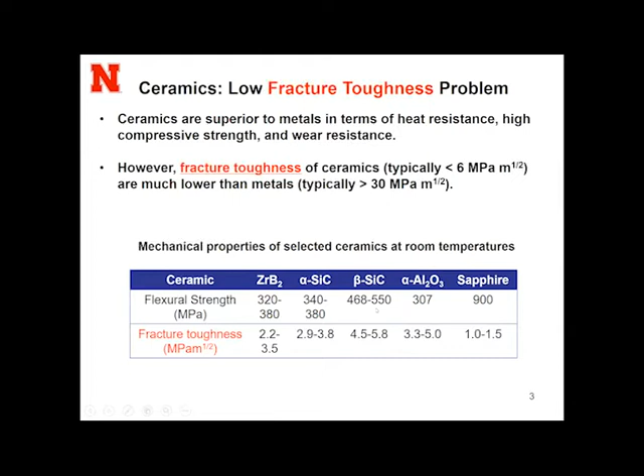The motivation for this work is that all ceramics have low fracture toughness. Also, ceramics have much higher strength and corrosion resistance than metals in extreme environments such as high temperature. Their low toughness is a big limitation for ceramics in industry applications.

To address this issue - ceramics have low toughness because they have low plasticity at room temperature. This results in crack sensitivity, which makes ceramics very brittle and easy to break. So our concept is to use laser shock peening to induce localized plasticity into the ceramic materials to improve their mechanical properties, which I will explain more about.

Our research goal is to understand the fundamental mechanism during laser shock peening of ceramic materials. I would like to say that, compared to metals, laser shock peening is not widely applied to ceramics. So we are doing some pioneering work in this area and trying to understand the scientific mechanism.

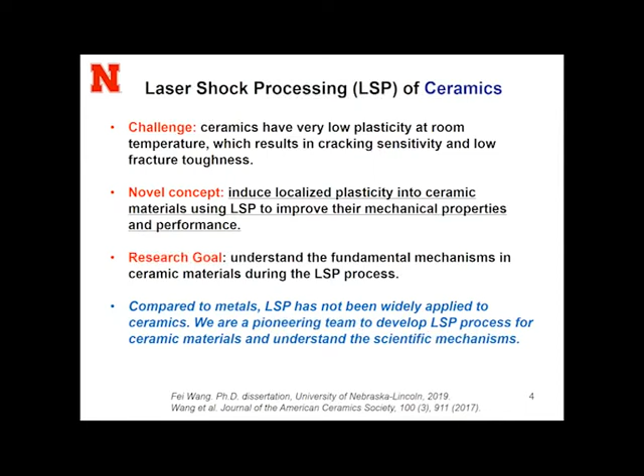I will skip these slides because many speakers have already talked about laser shock peening, but I would like to highlight something here: the shockwave has very high pressure, several gigapascals, and the plastic deformation occurs at a very high strain rate. This will be important for understanding the mechanism.

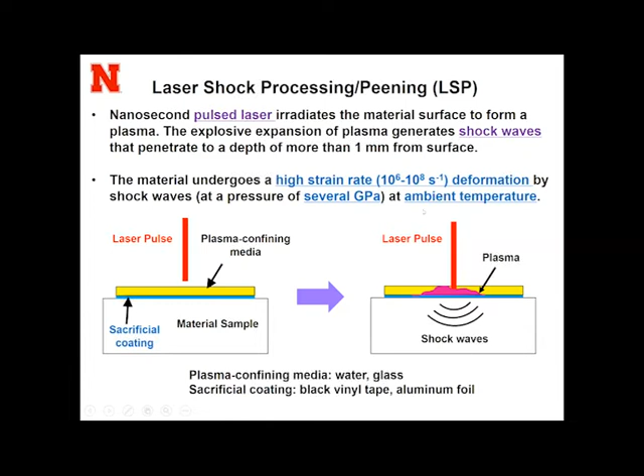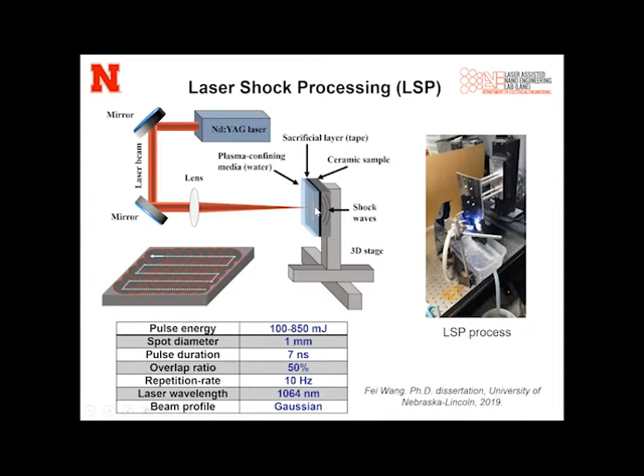At Nebraska, our lab developed our own laser shock peening system. This is a lab-sized experimental system. We use an Nd:YAG laser with nanosecond pulse duration, and we have our setup for peening the sample on a three-dimensional stage. We control the scanning of the laser beam for laser shock peening of large areas, or even curved surfaces. The hypothesis here is that the compressive residual stress generated by laser shock peening can improve the cracking resistance of ceramics.

This compressive stress can inhibit crack propagation on the surface. This is actually motivated by previous work in ceramics that generated surface compression using shot peening, thermal quenching, or similar processes. A lot of research has reported that putting this surface compression in place can improve fracture resistance, wear resistance, and provide many other benefits for ceramics.

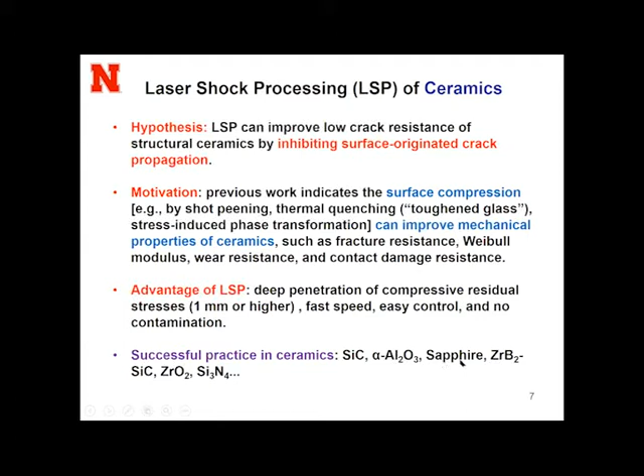But compared to those previous methods, the advantage of using laser shock peening is that it generates much deeper compressive residual stress, which can be 1 millimeter or higher. By using a laser-controlled system, we also achieve higher speed, easy control, and no contamination. So far, we have identified several ceramic systems that laser shock peening has been successfully applied to, including alpha alumina, silicon carbide, silicon nitride, and zirconia.

First, in the second part, I would like to talk about our work on using room temperature laser shock peening on silicon carbide ceramic.

The sample we got is polycrystal ceramic from a commercial vendor. When we got these samples, we did analysis and found the sample is not pure. It has some silicon phase along the grain boundary. Later we talk about the role of the silicon phase. This actually has some benefit, which is unexpected.

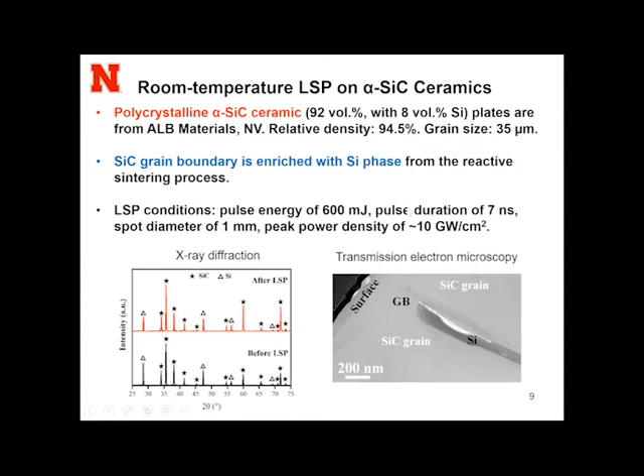But we conducted laser shock peening in the following condition. Here, this is the optimized condition. What we found here is pulse energy is a very important parameter to control the surface morphology and the damage.

If the pulse energy is too low, then the peening effect is also very low. But if we use a very high pulse energy, then it can generate a large number of cracks on the surface, which gives us the negative effect. So there is an intermediate energy, and in this case we found 600 mJ is the best pulse energy for silicon carbide. Here shows surface morphology of the sample before laser shock peening and after laser shock peening.

With this energy, we only see very tiny and very few micro cracks. Most of them are from the pre-existing flaws.

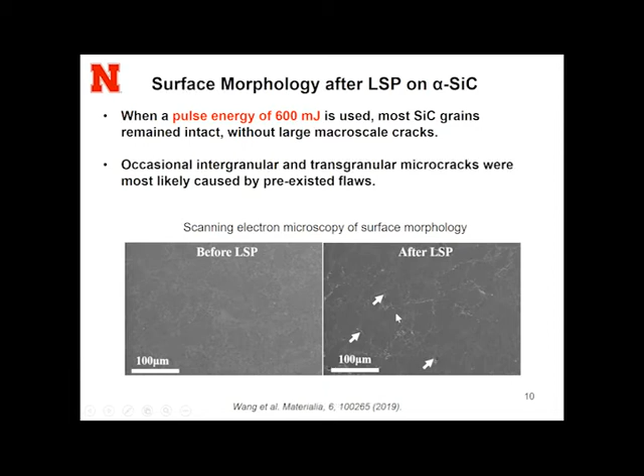And the surprising result here is similar to metal. We did TEM analysis of the cross section and found that near the surface and grain boundary there's a significant amount of dislocation.

So all these results are surprising because what we are doing here is laser shock peening at room temperature, and the common knowledge is that ceramic is very difficult to activate dislocation slip at room temperature.

So we call this localized plasticity in ceramic, because the plastic deformation of the dislocations is localized near the surface and grain boundary.

And this is not only on the silicon carbide, this also occurs in alumina. So we published two different papers on this. So this seems to be a common feature.

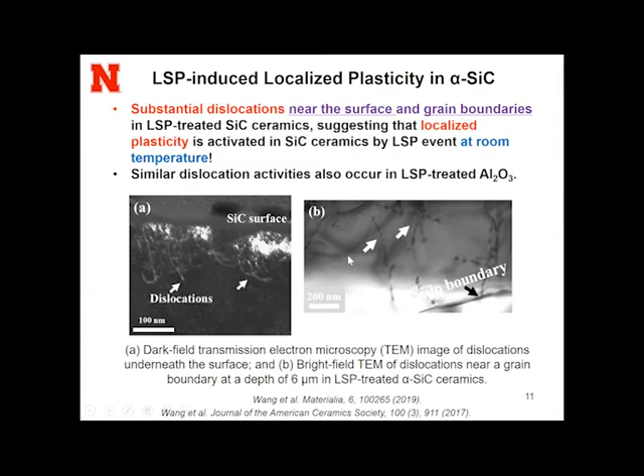And to explain this unusual phenomenon by laser shock peening, we go back to check some literature from a very long time ago. And what we found here is one thing.

When the shock wave generated by laser shock peening propagates across an interface, it can enhance the shock wave because some shock wave reflects back, and the shock wave pressure at the interface is enhanced when the different materials have different acoustic impedance.

And this kind of phenomenon is used for us to explain here, because in our case, the shock wave will transfer from the vinyl coating to the ceramic. So near their interface, there could be some enhancement of shock wave.

And in the second case, our grain boundary of the silicon carbide contains some silicon phase. So the acoustic impedance mismatch between the silicon carbide and silicon can also generate some local enhancement of shock wave.

So in general, we think that this shockwave, high shockwave pressure, together with the ultra high strain rate, because the laser pulse duration is very short, just a nanosecond, combined, can generate some localized plastic deformation in the ceramic.

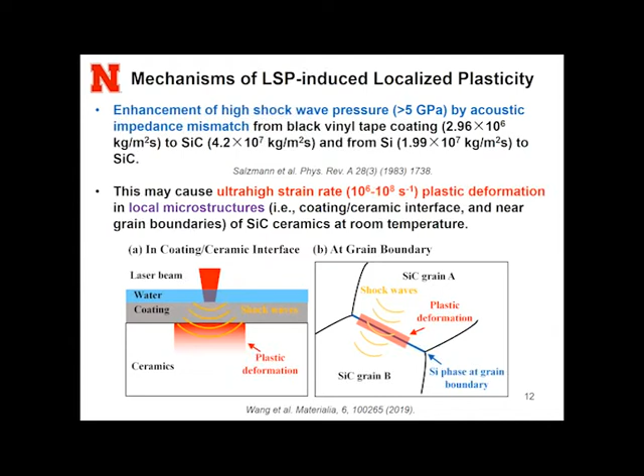I would say this is still a preliminary theory, and I hope some modeling can help us explain the mechanism. But no matter the mechanism, the result is clear.

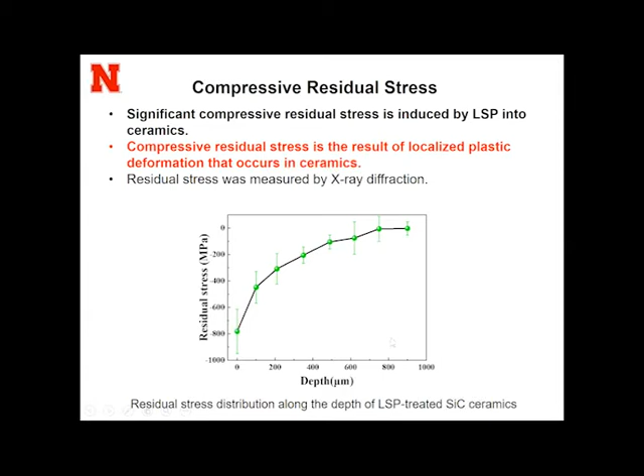We use X-ray diffraction to measure the residual stress along the depth. We see that the silicon carbide has generated a very high compressive residual stress on the surface, which can extend to a depth of 800 micrometers.

Because of the compressive residual stress, this can enhance the mechanical property. Because the laser shock peening is a surface effect, for evaluation of the mechanical property, we think Vickers indentation or nano indentation would be a better method to study than macroscale methods such as SENB.

So in ceramics, the common knowledge is that if you make a Vickers indentation, because ceramic is brittle, on the edge it will generate some cracks. And the crack lengths can be used in the equation to calculate the fracture toughness.

So here we compare the case before laser shock peening and after laser shock peening. You can see the crack length is significantly reduced, which indicates the fracture toughness is enhanced.

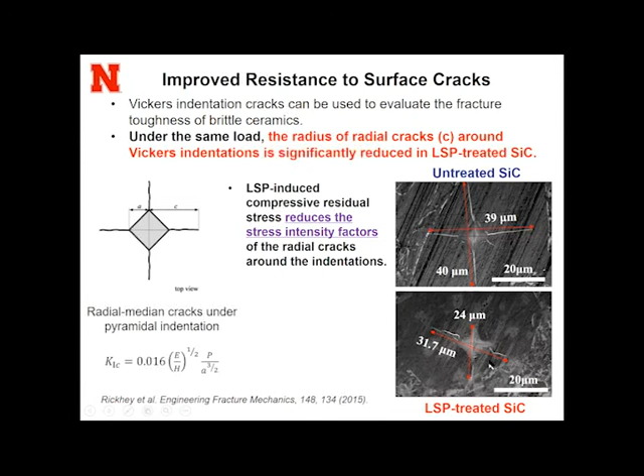And we can quantify the results here. The fracture toughness is measured this way, and the bending strength is measured using the traditional 3-point bending test, in which we do the laser shock peening on the whole surface of the bending bar. We found that both fracture toughness and bending strength are significantly increased in the silicon carbide after laser shock peening.

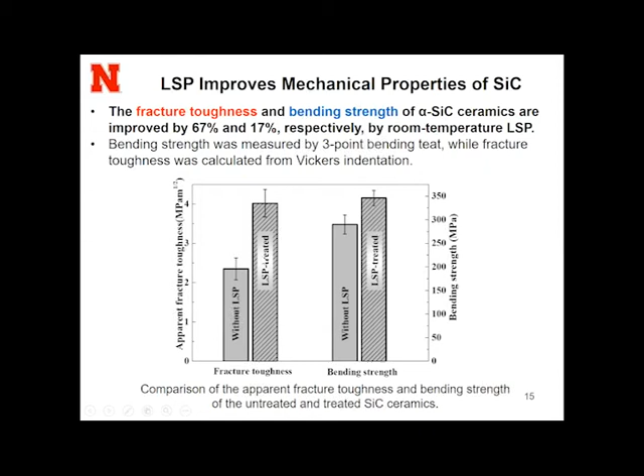The basic explanation for this mechanical property improvement, I would like to use the example by Kalentics in his paper. If you consider the case without any compressive residual stress under tensile load, the straight crack will propagate quickly in ceramic because ceramics are very brittle. But if we have built-in compressive residual stress, that can reduce the stress intensity factor at the crack tip, and it will also increase the threshold critical stress for crack propagation.

This effect can be quantified using another model by David Green, a famous ceramic scientist. His model shows that if you have a straight crack in ceramic materials with a compressive residual stress field, the stress intensity factor can be significantly decreased. This is used by us to explain why the fracture toughness and the bending strength are enhanced after laser shock peening.

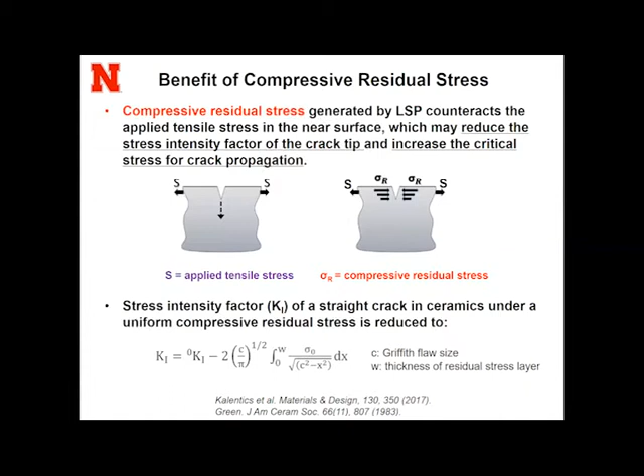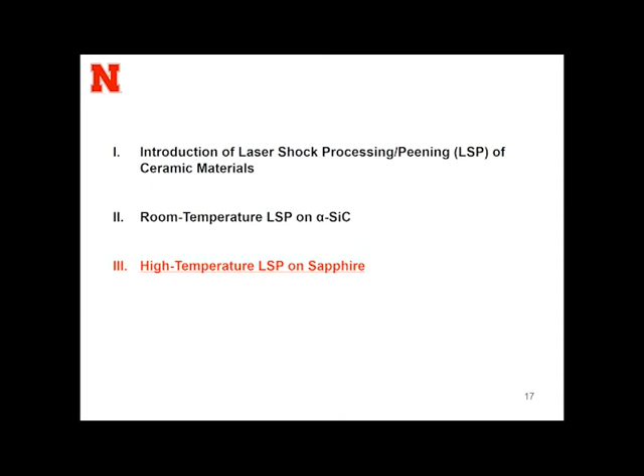The last part of my presentation, I would like to talk about our novel work using the high temperature laser shock peening process. This is a new concept because the motivation is here: when we do laser shock peening at room temperature on ceramic materials, because ceramic is very brittle, we need very careful control of the laser parameters to avoid shockwave damage.

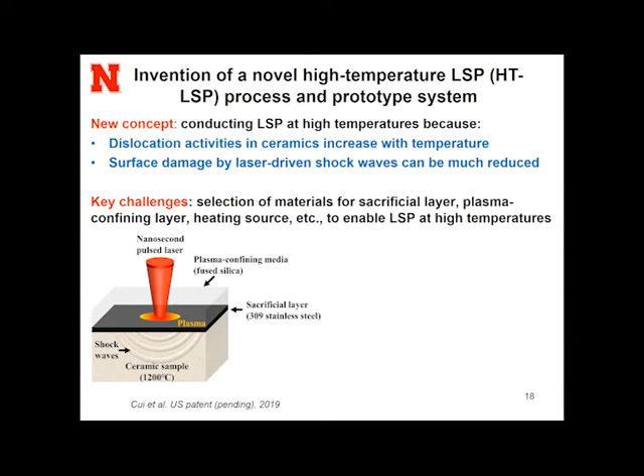So in 2016, we developed this new concept to perform laser shock peening at high temperature, because we know ceramic can have higher dislocation activity at high temperature, and a lot of ceramics have a brittle-to-ductile transition. For example, alumina's transition temperature is about 1000 C. Above the transition temperature, ceramic shows much more plasticity and ductility, and because of this higher ductility at high temperature, the surface damage by the shock wave can also be much reduced.

That was the idea, but when we performed the work, we found the key challenge is about the system, because we cannot use water as a plasma confining media anymore - we cannot use the setup we use for room temperature. So we spent a lot of effort selecting materials suitable for high temperature for the sacrificial layer, the plasma confining layer, and the heating source.

So finally, we invented our prototype system and filed a patent. Here shows a diagram of our experiments. We use stainless steel coating as a sacrificial layer, and finally we chose fused silica as a good material for the plasma confining media.

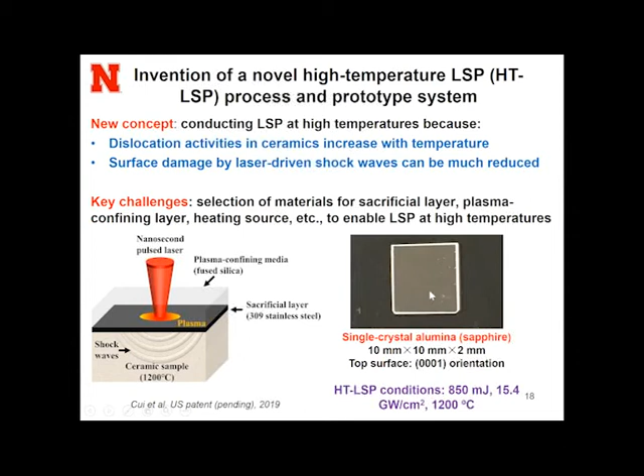But when we raised the temperature to 1200 C, we found the shockwave damage is now minimized - we only see a few micro cracks. So high temperature laser shock peening significantly decreases the surface damage, and this is also true for silicon carbide.

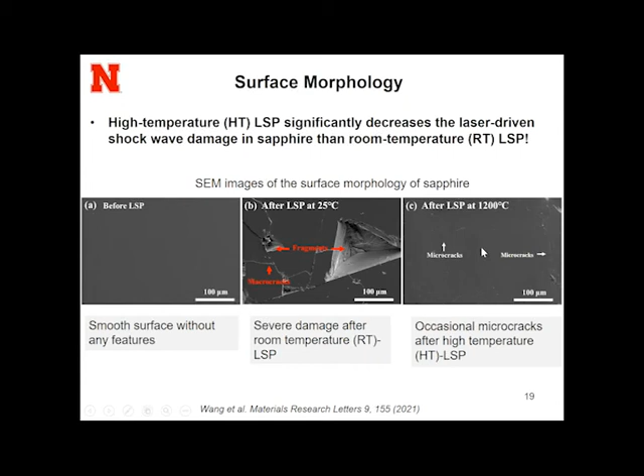For the measurement of residual stress here, we choose Raman instead of X-ray because we found the Raman spectrum has a much higher resolution. In our system, we can have a resolution as low as 20 micrometers, so we can measure the compressed residual stress distribution in one laser shock peening spot.

The mechanism to measure the compressed residual stress by Raman is the Raman peak shift. There's already literature about this, with established equations relating Raman peak shift to residual stress. After laser shock peening, the main peak shows a blue shift, which indicates compressed residual stress, and we can use those equations to quantify the results.

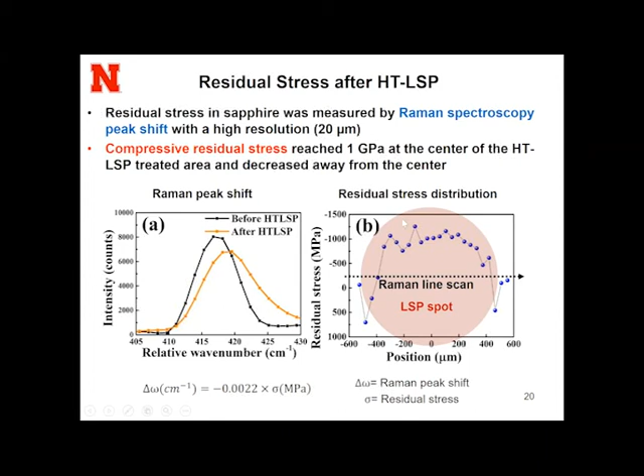By analysis of Burgers vector and slip plane, we found that most of them are basal plane dislocations. So basal plane dislocation is consistent with the deformation mechanism of single crystal sapphire, in which the main slip system is the basal plane at high temperature for alumina.

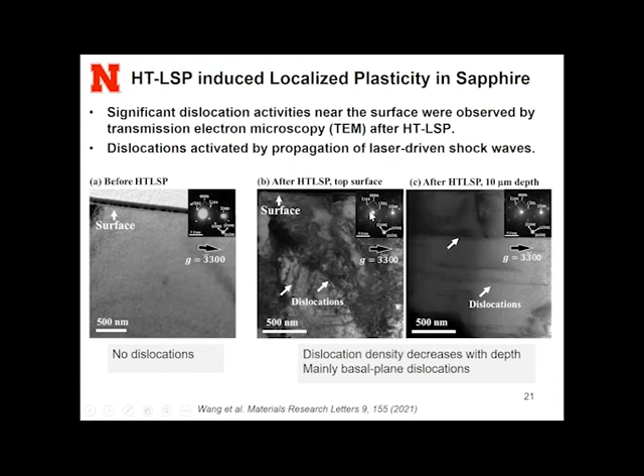We think the dislocation here is activated by the laser-driven shock wave. One evidence is that the shock wave pressure decreases with depth, and the dislocation density also decreases with depth.

After the high temperature laser shock peening, when we studied their mechanical properties by both Vickers indentation and nano indentation, we found the crack length is significantly reduced, which indicates fracture toughness increase.

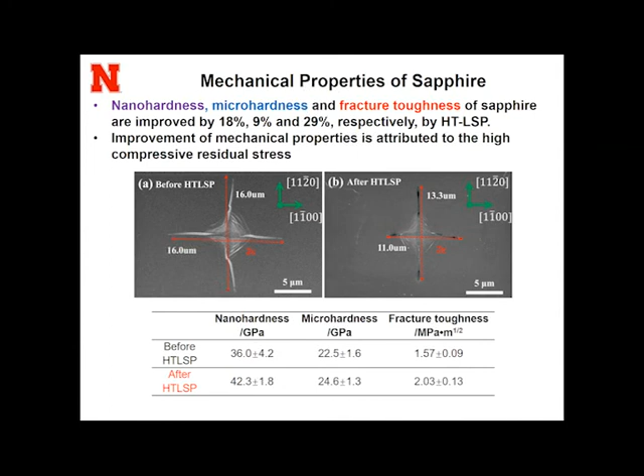Because sapphire is a very good optical ceramic, it has very high optical transmission over a large range of wavelengths. So we are curious if the laser shock peening has some effect on the optical transmission. But the results show it's very good - only a slight reduction. So the optical transmission is maintained.

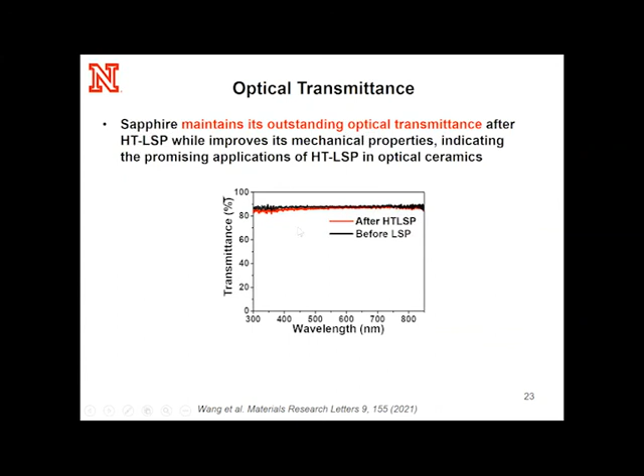This suggests there could be some promising application of our process in optical ceramics, and other ceramic systems beyond sapphire.

In summary, we found that laser shock peening can activate localized plastic deformation in ceramic near the surface at different temperatures. The mechanism could be related to the very high shockwave pressure and high strain rate deformation.

We have invented our novel high temperature laser shock peening process, which seems to be more effective than room temperature laser shock peening, to decrease shockwave damage and enhance dislocation activity.

In ceramics, similar to metals, we can also generate high compressed residual stress. And the fracture toughness, strength, and hardness can be enhanced by laser shock peening.

Below I show a list of some of our publications and patents. If you're interested, you can get more details of our work from these publications.